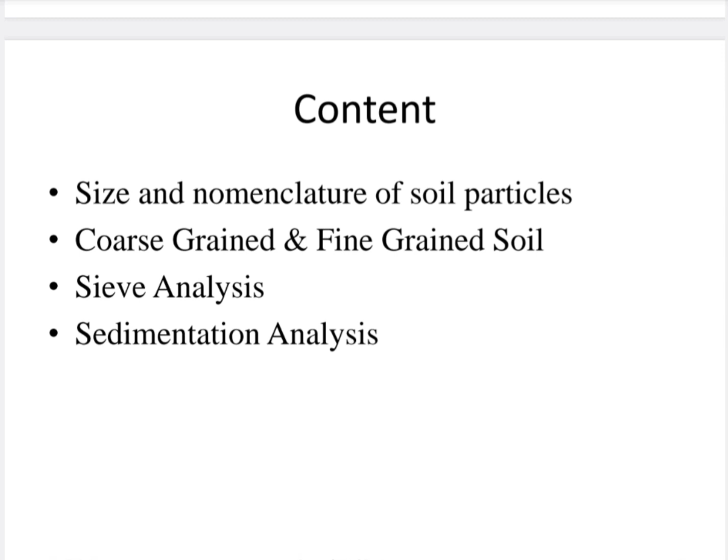Today we'll be discussing size and nomenclature of soil particles, coarse grain and fine grain soil, sieve analysis and sedimentation analysis.

Natural soil, as we know, is a mixture of various size of particles. To determine the particle size, a square hole sieve is used, expressed in single diameter.

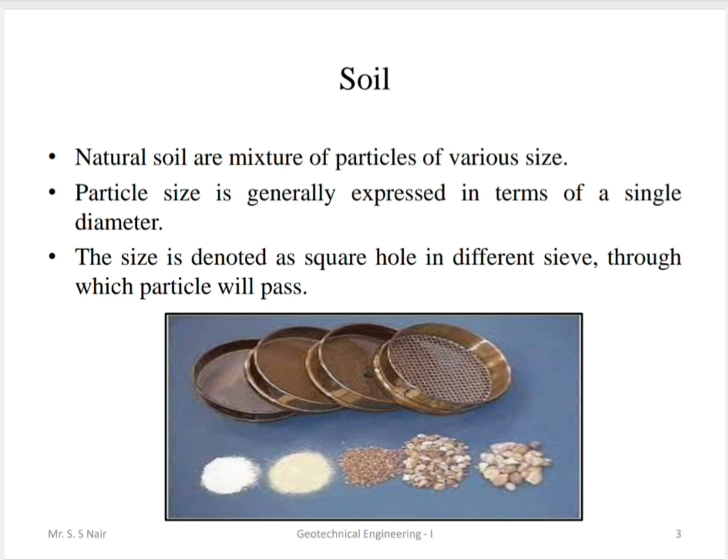Size and nomenclature according to the Bureau of Indian Standard IS 1498:1970. Very coarse, coarser and fine soils are described.

Boulder size greater than 300 mm, cobble size 80 to 300 mm, gravel 20 to 80 mm coarser and 4.75 to 20 mm finer. In sand, 2 to 4.75 mm coarser, 0.425 to 2 mm medium, and 0.075 to 0.425 mm finer.

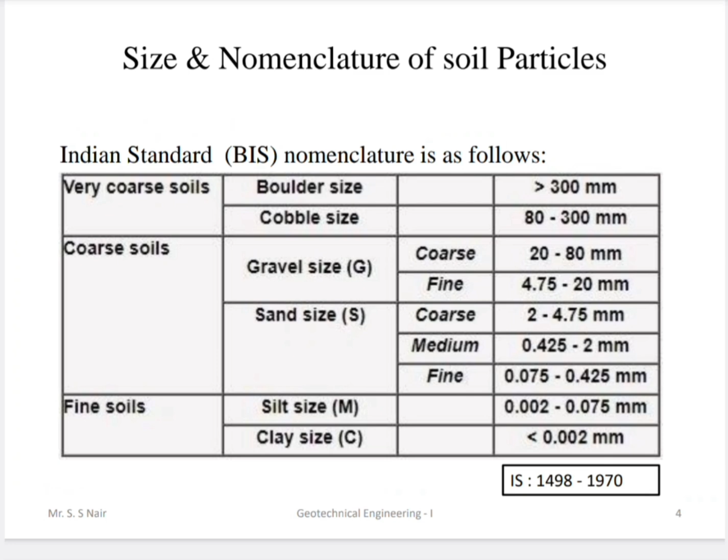Now finer soil includes silt and clay. Silt size is 0.002 to 0.075 mm and clay is less than 0.002 mm. Gravel is denoted by G, sand by S, silt by M, and clay by C.

Now, what is the difference between coarse grain and fine grain soil? Coarse grain is frequently identified based on particle size, and fine grain based on plasticity. Individual particles are visible in coarse grain, while in fine grain they may not be visible by naked eyes.

Coarse grain is divided into two categories: gravel and sand. In fine grain we have silt and clay. The shape of gravel varies from round to angular, silt tends to be spherical, and clay may be flaky shaped.

Particle size larger than 4.75 mm is termed gravel, and 4.75 mm to 75 micron is sand. In fine grain soil, particle size from 75 micron to 2 micron is said to be silt, and less than 2 micron is clay.

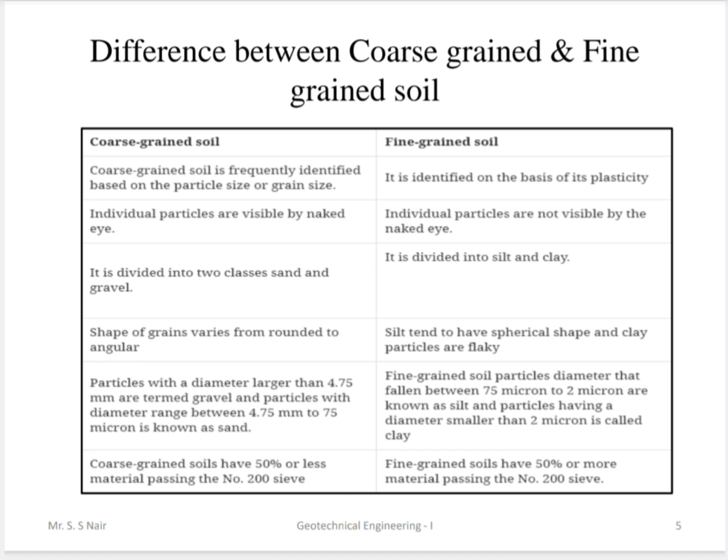Coarser grain soil has 50% or less material passing through the 200 sieve. Finer particles of soil have 50% or more material passing through the 200 sieve.

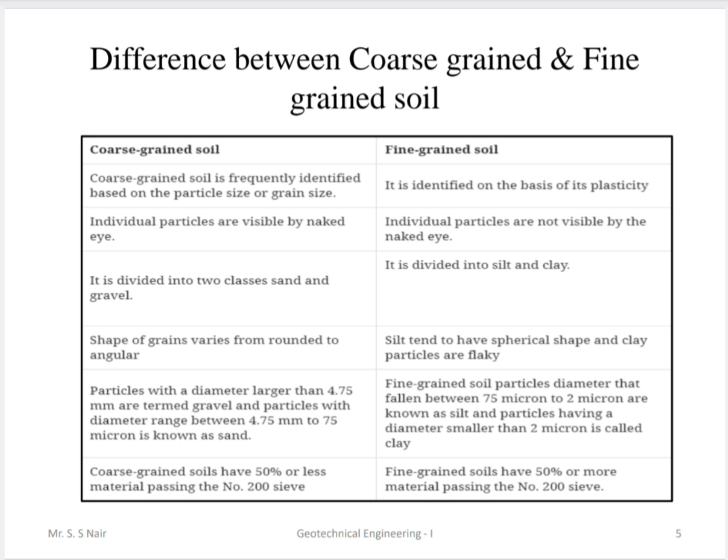Using mechanical analysis we can determine the size of various particles, which may be coarser or finer. Sieve analysis is a dry analysis process where particle size greater than 75 micron is analyzed, which may be of two types: coarser sieve analysis and finer sieve analysis.

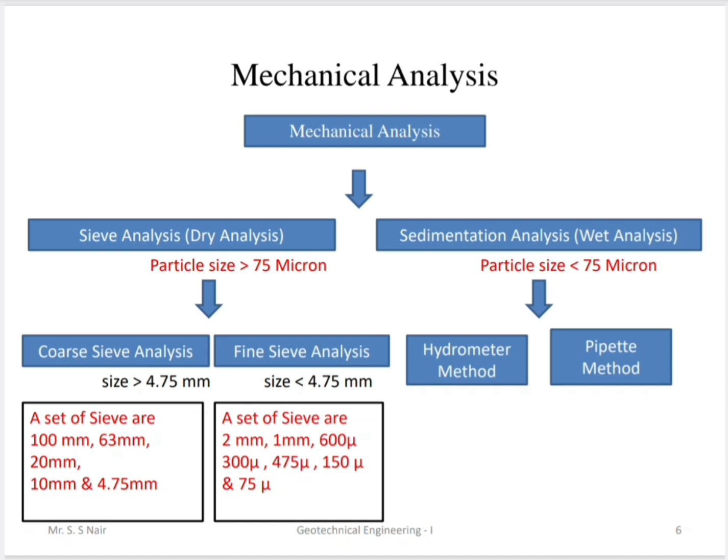Of 4.75 mm and greater, identified by coarse sieve, and less than 4.75 mm identified by fine sieves. Here you can see the set of coarse sieve and fine sieve.

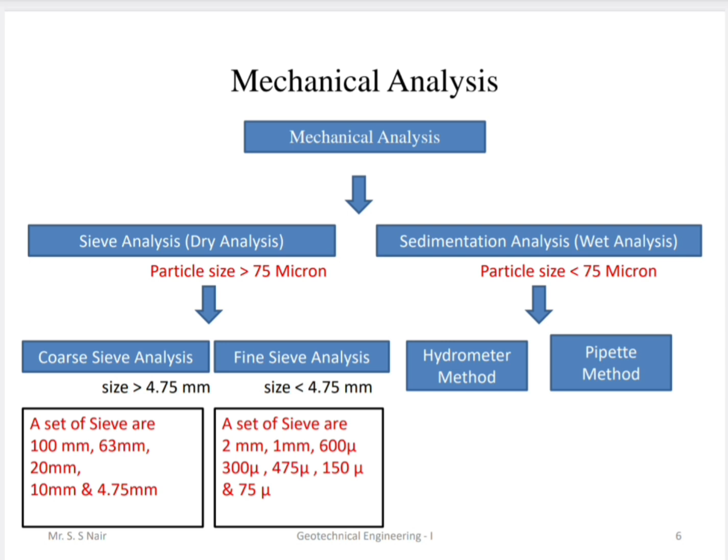Similarly, sedimentation analysis is a wet analysis process for particle sizes less than 75 micron, which may be identified by the hydrometer and pipette method.

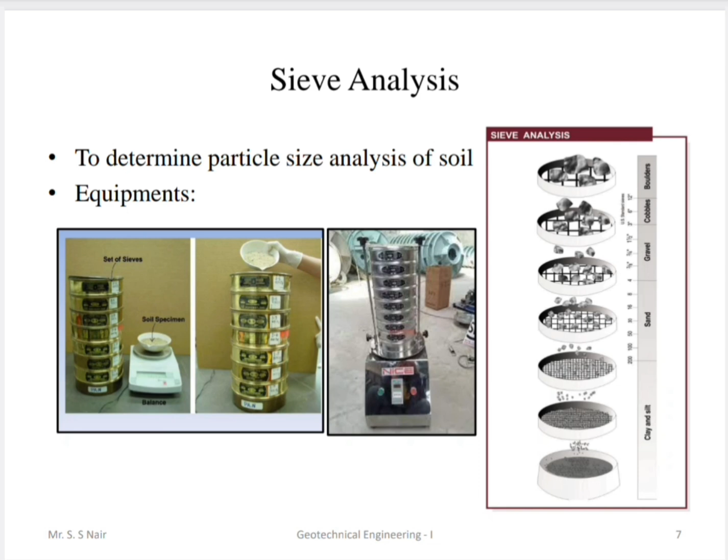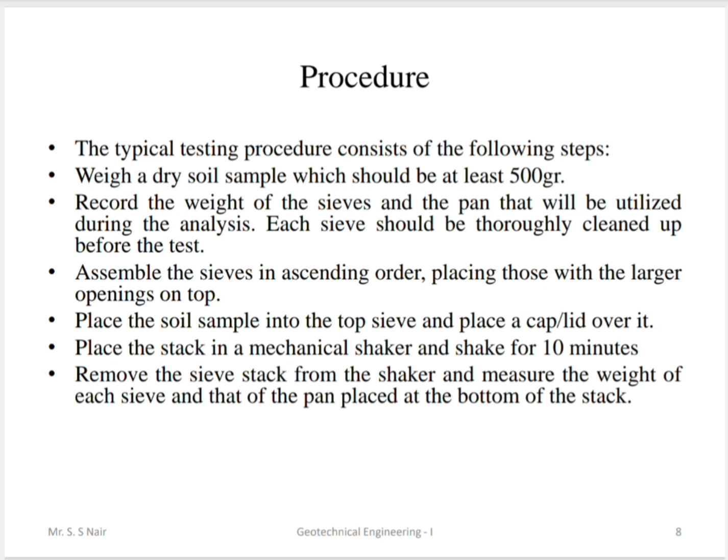Procedure to find out the particle size using sieve analysis: first, weigh a dry soil sample taking at least 500 grams. Record the weight of the sieve and pan that will be utilized during the analysis.

Clean up all the sieves before the test. Assemble the sieves in ascending order, with the larger sieve at the top. Place the soil sample into the top sieve.

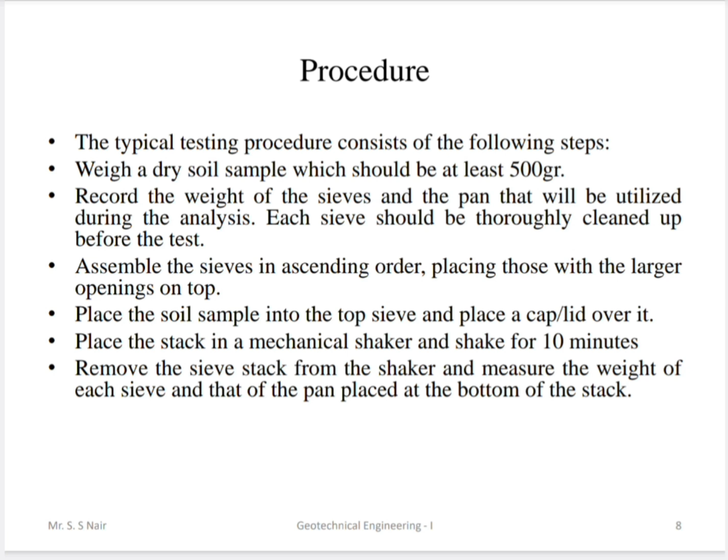Place the lid or cap and place this whole set of sieves on a mechanical shaker for 10 minutes. Remove from the sieve shaker and measure each retained particle on the sieves and the pan placed at the bottom.

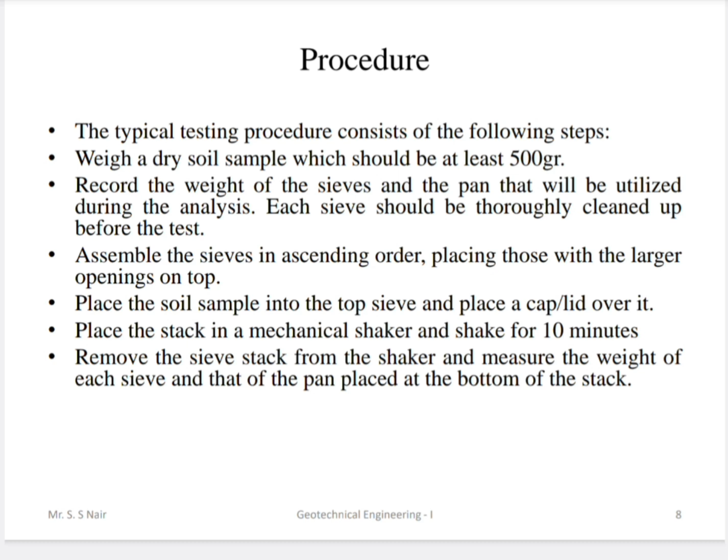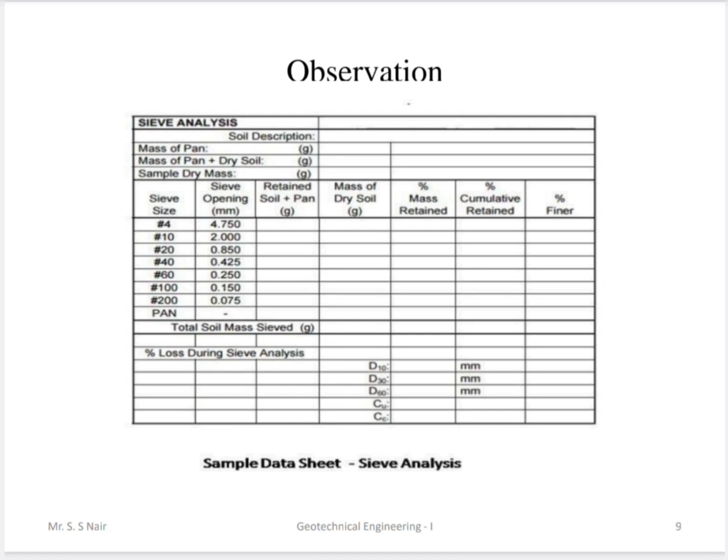Here is the observation table where we'll be recording all the retained soil, percentage retained, cumulative retained, and finer mass. By filling the observation table, we'll get the percentage of particle size.

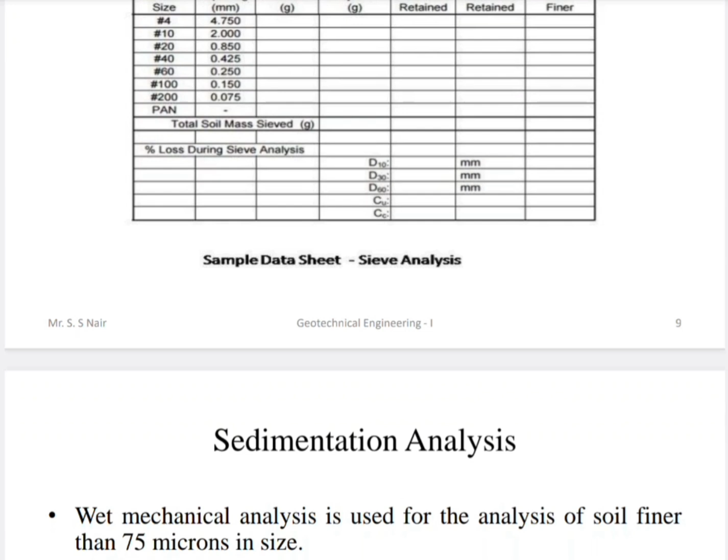Now for particle size less than 75 micron, we need a sedimentation analysis, which is a wet process. The sedimentation analysis can be done either by hydrometer or pipette.

So here, in order to analyze the sedimentation analysis, some of the assumptions are: particle size may be a perfect sphere, the liquid through which the particle falls must be of indefinite extent, and the particle reaches constant terminal velocity within a few seconds and maintains it indefinitely.

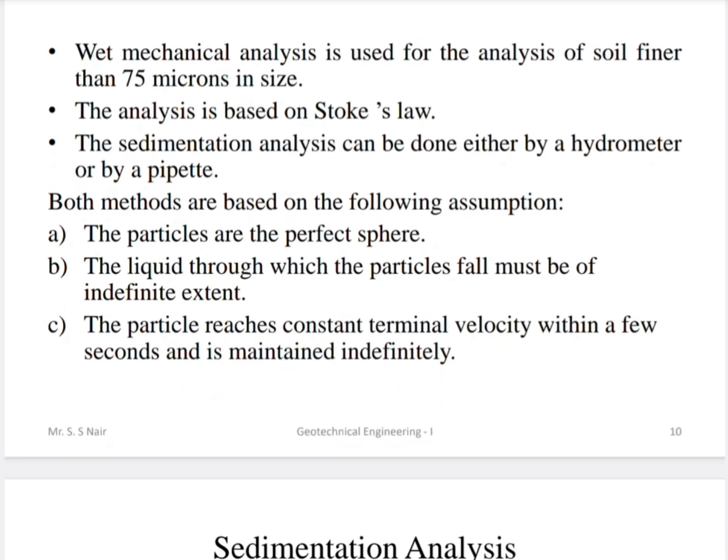Sedimentation analysis is based on Stokes' law, which is the velocity of a particle undergoing settlement within an indefinite or infinite medium, depending upon size, shape, and mass of the particle, said to be the terminal velocity. Here Vs equals G minus 1,

small g, d square, by 18 mu. Capital G is the specific gravity, small g is the gravity, d square is the diameter of the particle, and mu is the viscosity of the fluid.

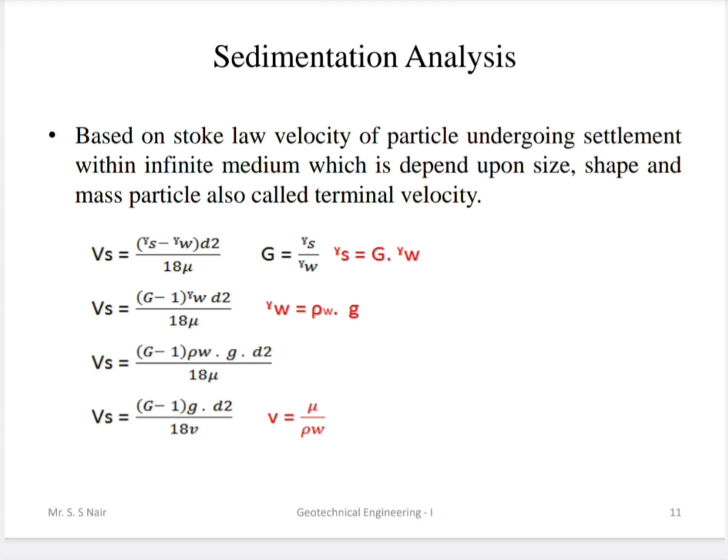So based on the assumptions, there are some limitations. Particle sizes are assumed spherical, but finer particles may be flaky or needle shaped. Specific gravity of solids for different particles is different, but we use an average value, which is also a limitation.

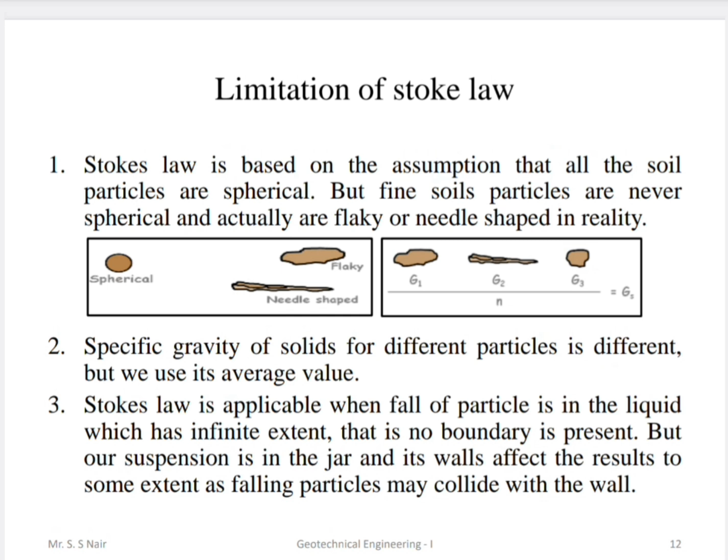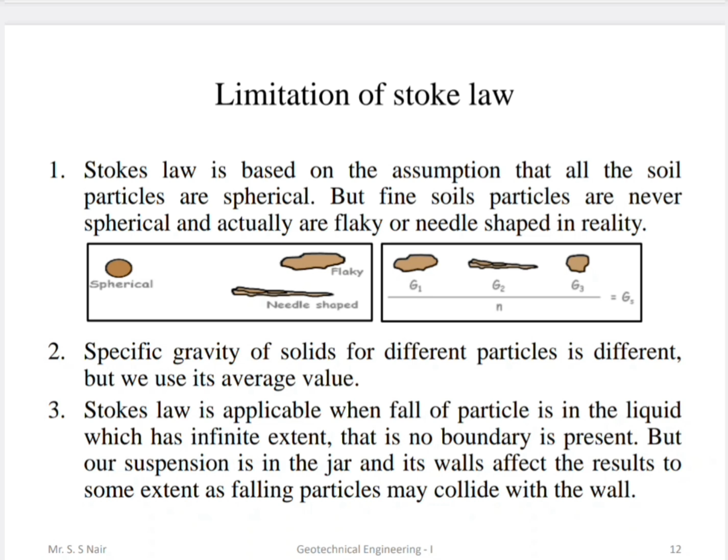Stokes' law is applicable when the fall of the particle is in a liquid of infinite extent, that is, no boundary is present. But our suspension is in a jar and its wall affects the results to some extent, as the falling particle may collide with the wall. So this is also one of the limitations.

We have also assumed that there is no interference on the movement of particles by other surrounding particles, which is also a limitation for us.

Sedimentation analysis cannot be used for particle size larger than 0.2 mm because they may generate turbulent conditions, which is also a limitation.

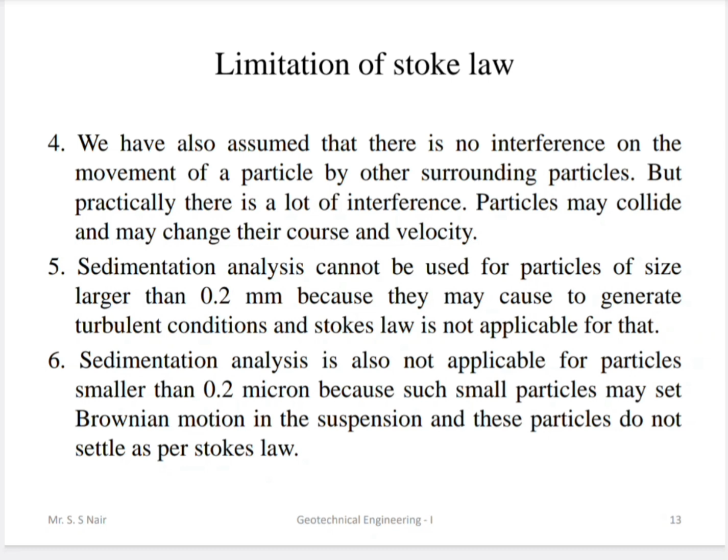Sedimentation analysis is also not applicable for particle size smaller than 0.2 micron. So these are all some of the limitations based on Stokes' law.